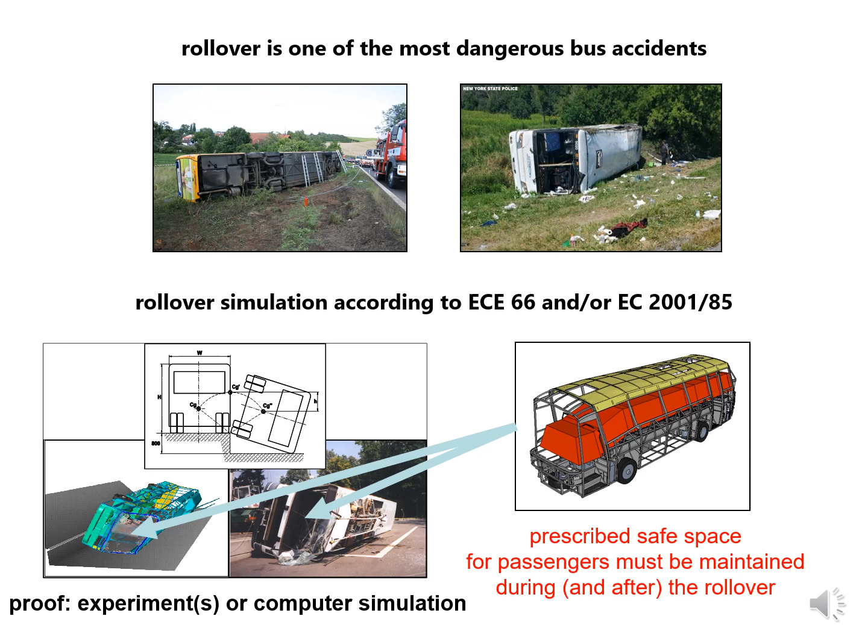all buses now have to fulfill the prescribed testing for rollover. You can see a picture which demonstrates the test. This is a quasi-static test. This is the rollover, and the main condition is that the prescribed safe space for passengers must be maintained during and after the rollover. Rollover can be performed physically, and this is the usual way. Now it's possible to perform computer simulations.

We participated in the two projects I have mentioned. One was performed with a Czech company from Prague, Vision Consulting Automotive, and a Czech producer of buses. The project has the name Research and Development of Articulated Electric Bus, and we were involved in testing of the whole materials from which the new sandwich roof of the bus was constructed.

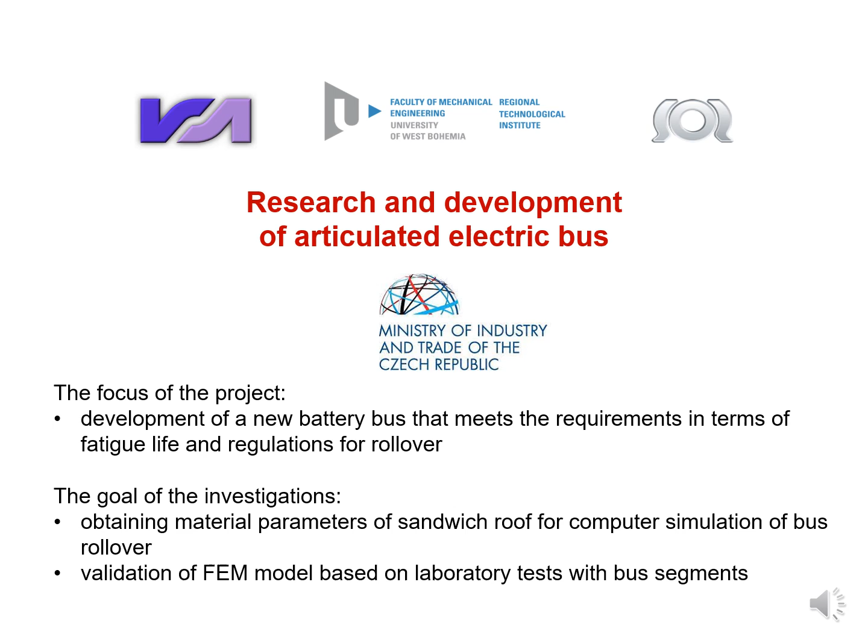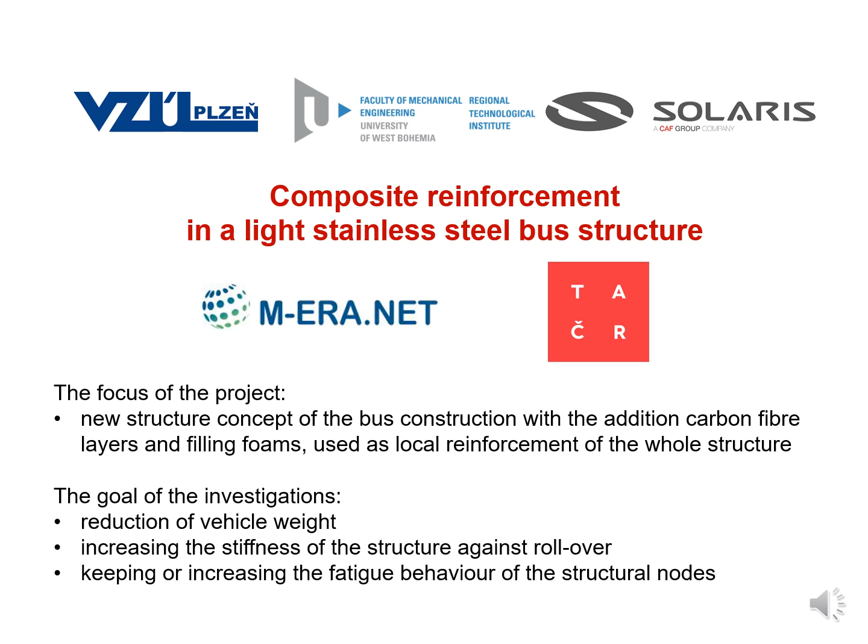The second project we are still solving, with a very nice collaboration with another research institute in Pilsen and with the Polish bus producer Solaris. The focus of this project is to develop a new structural concept of the bus construction with the addition of carbon fiber layers or filling foams, and to obtain weight reduction with still very good fatigue life and rollover resistance.

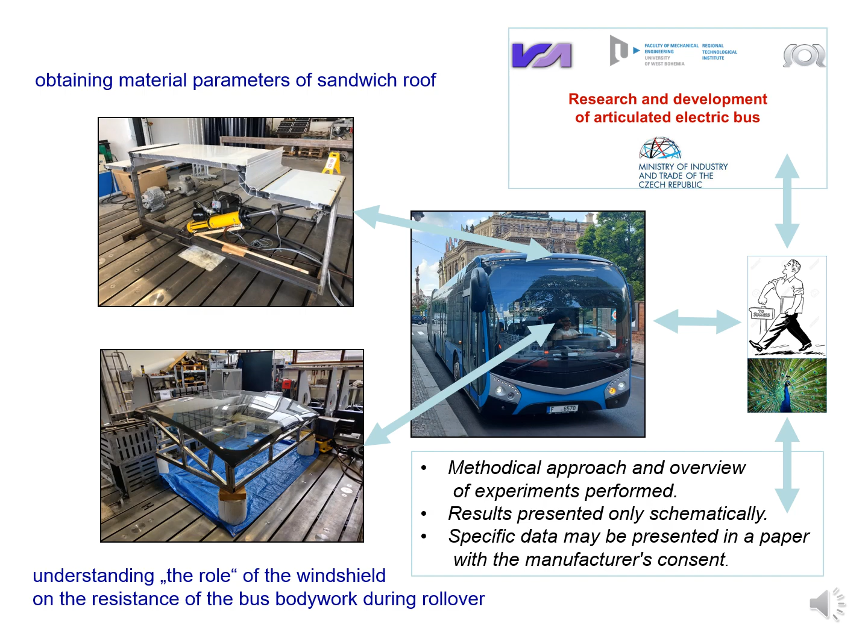I would like to speak about the first project, which we finalized last year by testing the prototype of the articulated battery bus. I will show you not scientific data, but the methodology we used during testing of the whole materials which were used for the new sandwich roof. I'm very proud of this type of collaboration because it's very useful for an academic research center to have collaboration with industry.

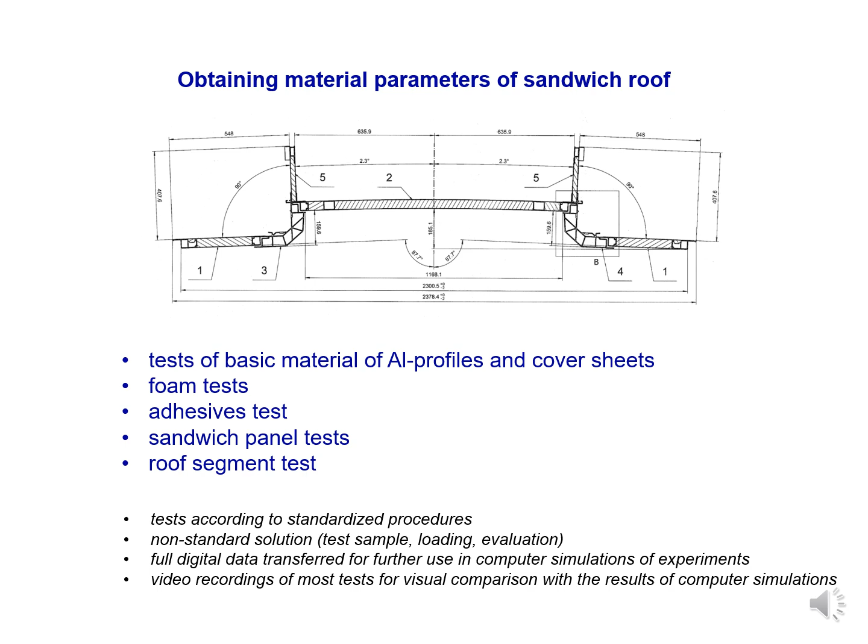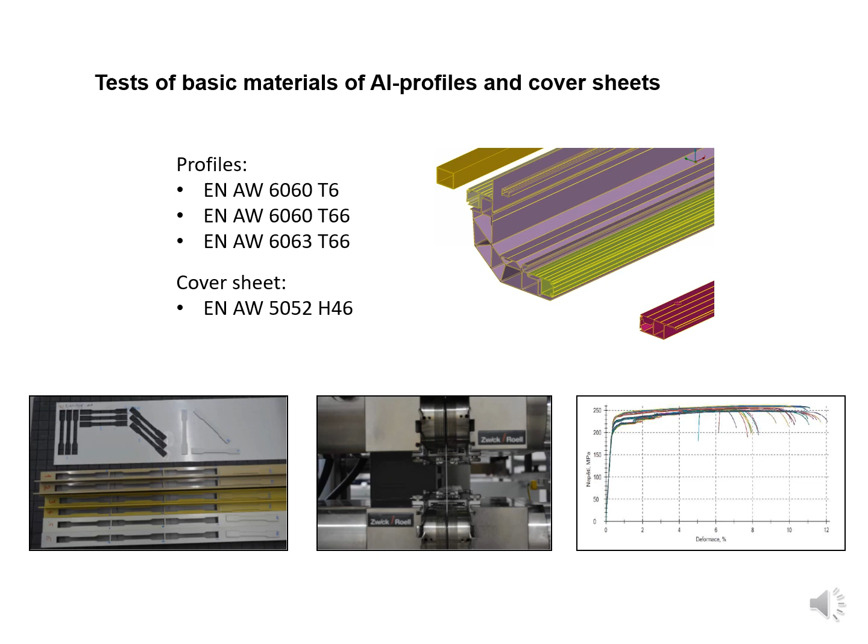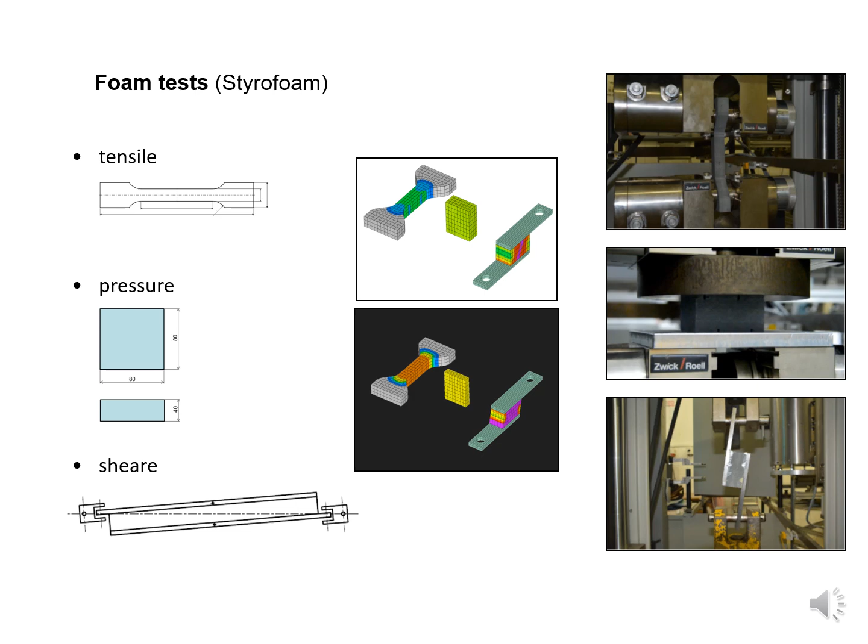At first, we performed base testing of basic materials, the aluminium profiles and cover sheets. You can see specimens prepared for testing and examples of measured data. All data were sent in digital form to our partners who performed the computer simulation, and tests were monitored by video, to have the possibility to compare the results of computer simulations at the level of testing specimens and later on testing the whole segment of the roof.

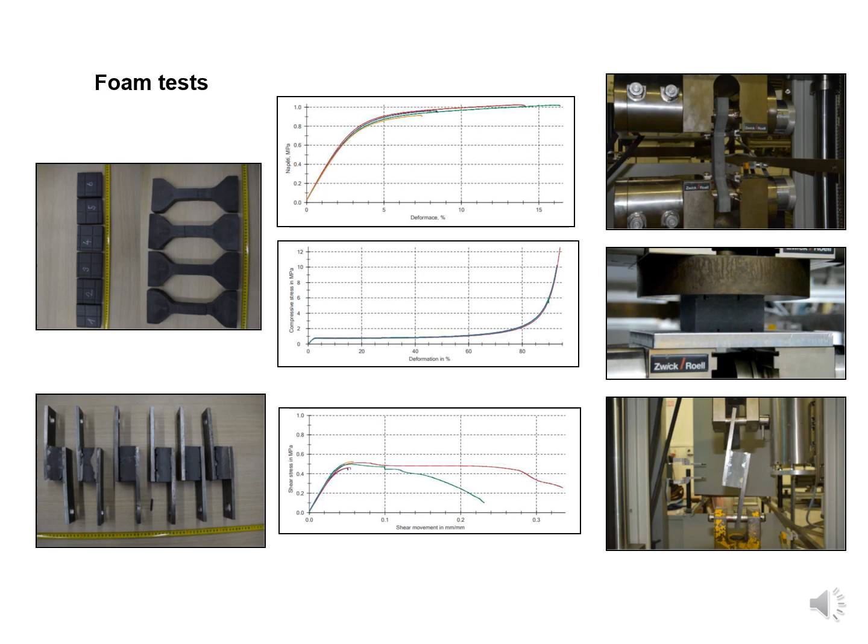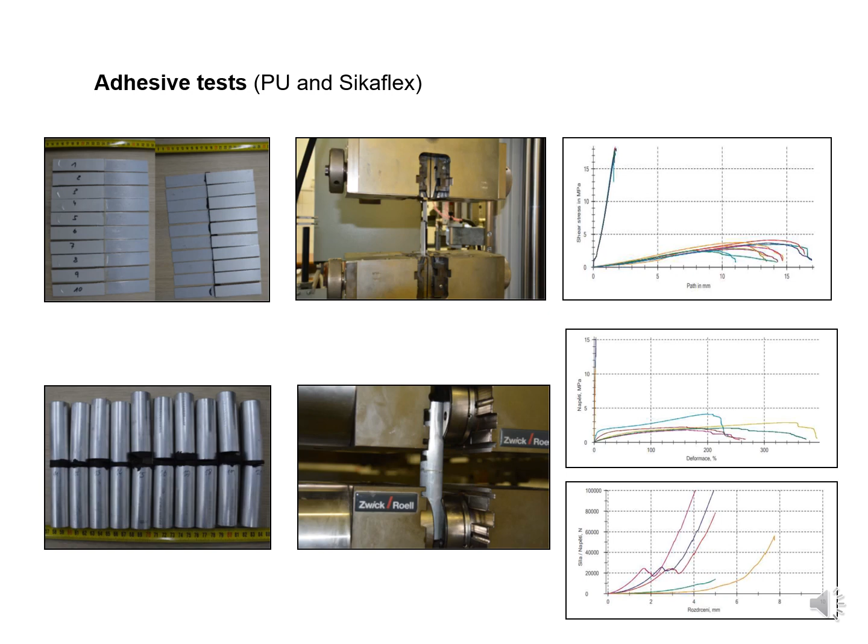As a final part of our investigation, the segment of the roof was tested by an electrohydraulic system. We tried to model the diagonal deformation of the roof during the rollover. Our colleagues who performed the mathematical calculations gave us information about the speed of deformation during the rollover, and after that it was possible to perform the whole simulation with the whole vehicle and to obtain the certification from the certifying authority.

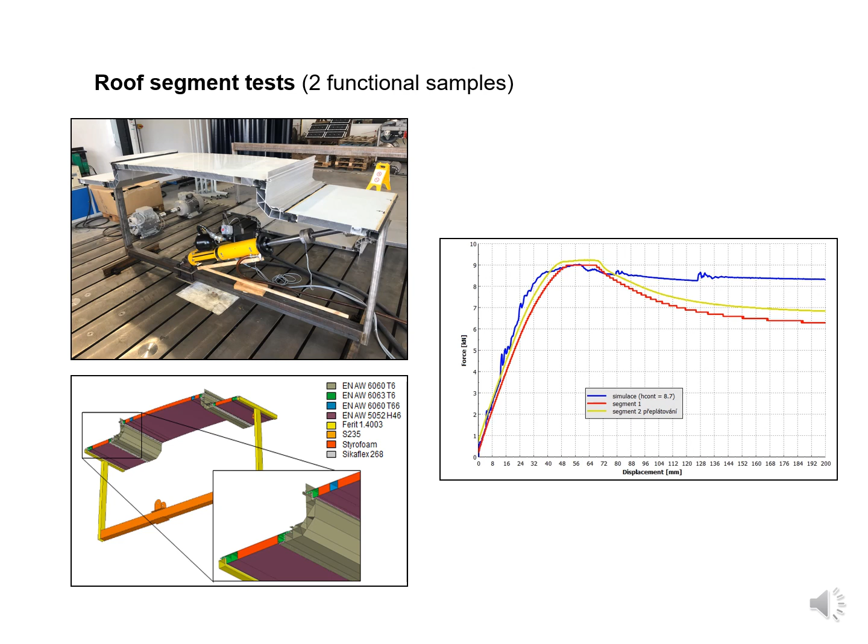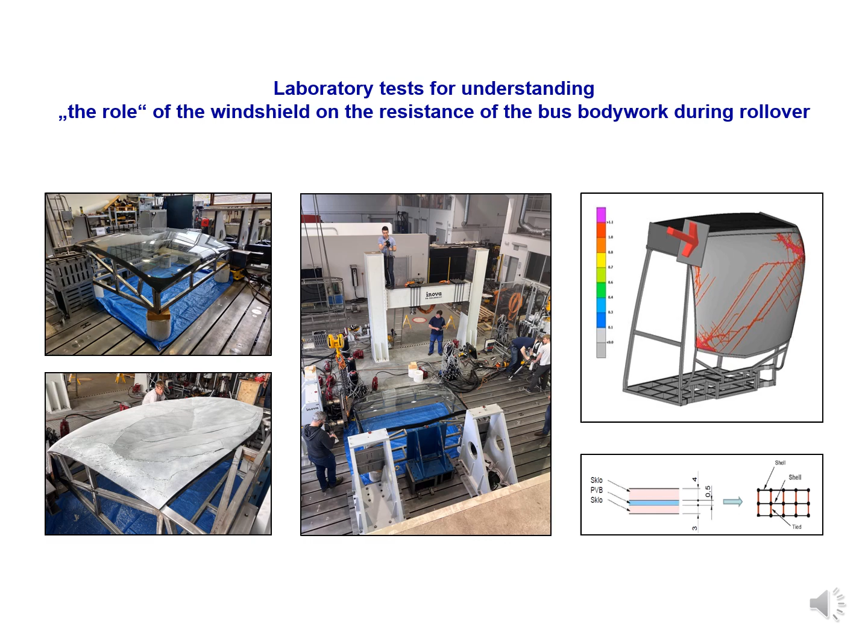Besides these experiments and calculations, we performed similar tests of the front part of the vehicle to understand more the role of the windshield in the resistance of the bus bodywork during the rollover. All data are now secret, but if we are invited to present the data in more detail, I hope I will be able to obtain the agreement of the company to present these results.